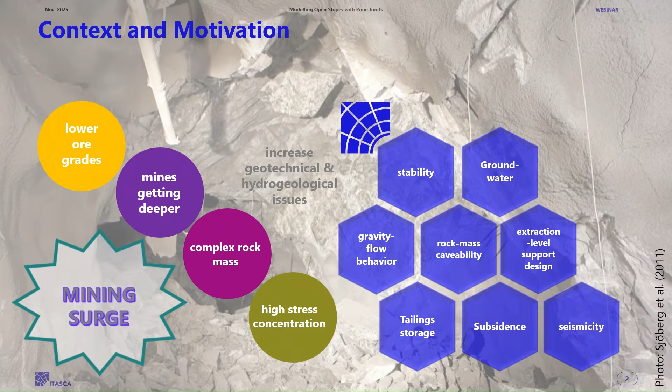If you are attending this webinar, it's likely you're into mining, as well as involved in analytical and numerical models. And we find this very exciting because mining is a field that's in high demand, especially now that we seem to be living the electrification boom. In very simple terms, as ore grades decline and mines become deeper, we increasingly face a more complex rock mass and high stress concentrations, which in turn lead to more difficult geotechnical and hydrogeological issues, such as seismicity, cavability, stability, or groundwater.

Important to keep in mind that every model is an attempt to represent reality. The model certainly contains simplification and assumptions given the heterogeneous nature of the rock and its surrounding. Still, these numerical models can be extremely complex. Depending on our area of interest, we may seek an understanding of rock breakage at the grain size as an assembly of minerals, or we might focus on large volumes as the rock mass.

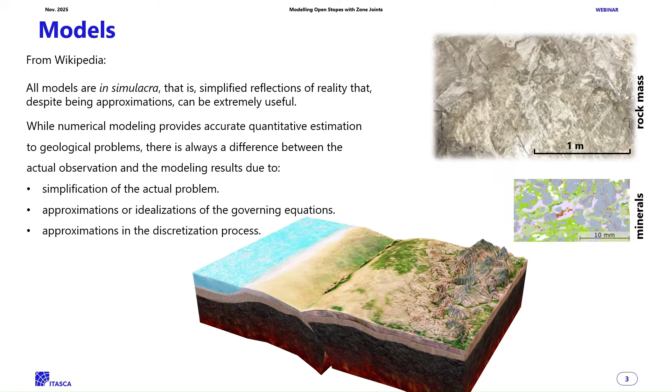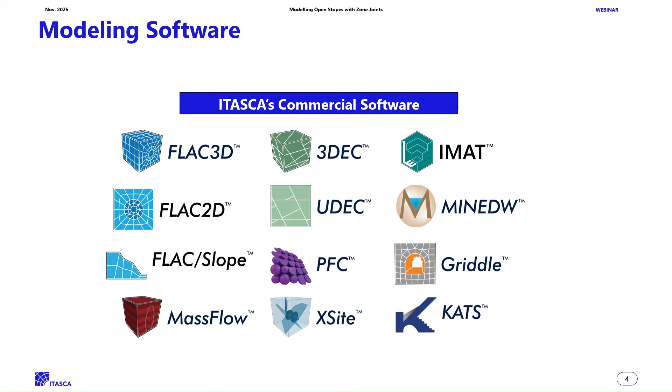The empirical analyses are often conducted in parallel with numerical modeling, using numerical inputs to broaden the scope of the assessment. While ITASCA has a range of robust and mature software, we continuously improve them to incorporate more data and information that comes with new technologies and advances in the mining sector, enabling them to run faster and produce reliable results.

IMAT automatically compiles FISH codes for the user. The IMAT allows tracking the mine sequence and provides a clear workflow to build, solve models, and analyze results. And IMAT also extends beyond a numerical modeling software, as it caters for multiple field data sources, including seismic data, block model borehole, and other monitoring data. The goal is to incorporate all of these data sources to improve our numerical models.

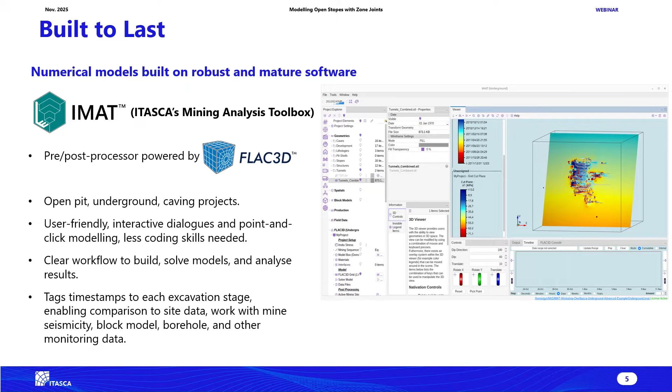Over the years, ITASCA's engineers and software developers have a proven track record of innovation working alongside our ITASCA consultants. We have developed new strategies, tools, and methodologies to better understand complex and very large models. While the computational limitations are less critical now than they were a few years ago, most of our models are still very computationally intensive.

Today, ITASCA can run large and complex models using MPI and cloud computing. And these large and complex models require the combined expertise and experience of our team to post-process and analyze the results. It is truly amazing how changes in hardware and software are evolving fast, and we can now look at the interaction of excavations taking into account the entire mining footprint.

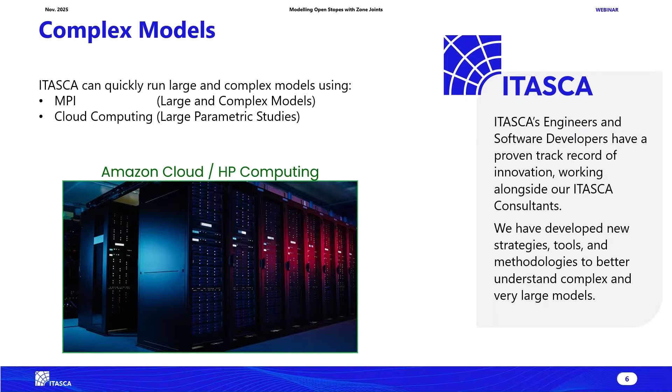So whether the challenge is an open pit or underground, whether it's a project or an ongoing operation, our ITASCA Consulting has a multidisciplinary team to provide practical field solutions to design issues and mitigate risks. In our work, we are specialized in the application of ITASCA's modeling tools to solve difficult or unusual problems across a wide range of mining methods and materials.

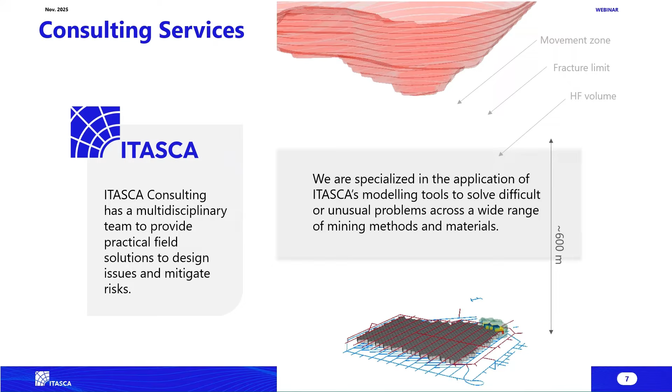The design of footprint is also changing, and we now have these extremely large layouts such as caves or super caves. So we see changes in design, equipment, and monitoring data, along with opportunity for real-time optimization. As we spoke about large and complex models, we want to share some insights from data collection. We want to highlight that ITASCA has in-house expertise to design field data collection campaigns, conduct the geotechnical characterization, compile and validate data.

It's also great when a mine site can collect a large amount of data, but it's also important to distinguish between different levels of confidence. We can work with the people on site, and this allows us to evaluate the quality of the collected data.

This helps us understand the variability and the level of confidence in the geological, geotechnical, and hydrogeological information input into the models.

Overall, we are seeing more projects being developed in varied and complex environments, often covering large footprints, and we know that these environments might be outside of our existing experience.

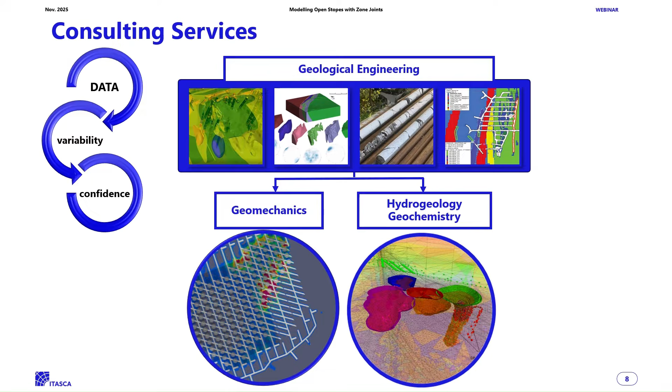We are here to offer our knowledge in data collection, processing, and running a variety of models and dealing with complex fields. We bring this up because the outcome of a model can change significantly depending on the input parameters.

For example, the structural geology, such as faults and joints, are equally important in determining the stability of an open pit and a stope located deep underground.

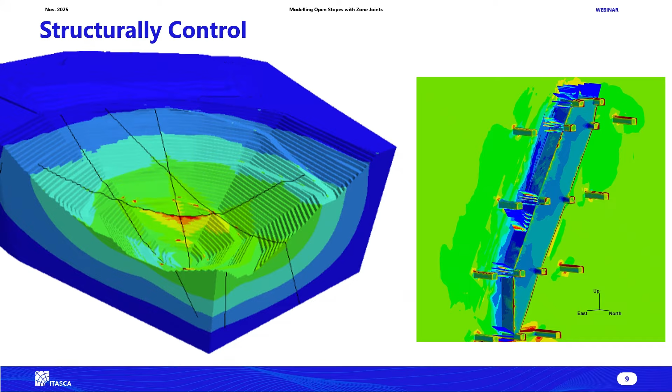In this webinar, we'll be talking about stability within the context of numerical modeling.

ITASCA's portfolio of completed models is extensive, and while we would love to showcase some of our large and complex models, confidentiality agreements restrict our ability to do so.

So today we will present some interesting examples of high-stress environments to demonstrate the rock mass responses when tunnels and stopes are excavated, as we are more likely to be working in deep or even ultra-deep mines.

We want to be able to more rigorously represent the ground conditions so we can capture high deformations.

Basically, we want to know if the excavations are stable, or if we are having squeezing or crushing, or what kind of support needs to be installed, as these are some of the important things impacting stability.

As illustrated in these pictures, we see that the size and the shape of the rock blocks formed around a tunnel and the failure process are conditional to structural geology, such as joints and faults, and the proximity and location of surrounding excavations.

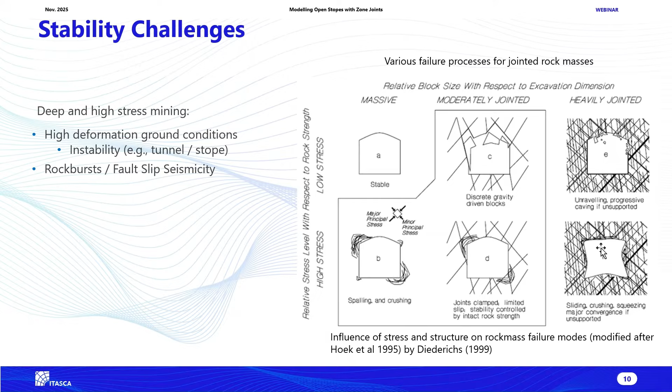They are also conditional to the local induced stress states.

When running three-dimensional numerical models, we first select the software. Here we will discuss two options, which are FLAC3D and 3DEC.

FLAC3D is an explicit finite difference software to model the behavior of materials that are subject to plastic yielding. It is a continuum-based code, but it can also incorporate structures into the model, either implicitly using the ubiquitous joints.

Or as discrete structures using interfaces or zone joints.

3DEC is a hybrid continuum discrete element software for modeling block or highly jointed systems. Materials are represented by a network of continuous blocks with surface conditions, and these blocks may rotate or slide along joints.

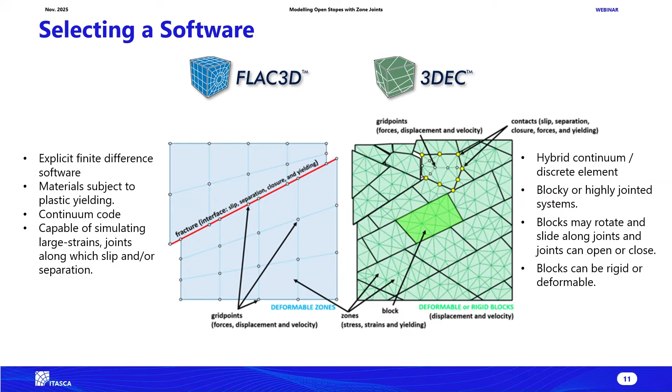FLAC3D is best suited for modeling rock masses that behave predominantly as continuous media with limited jointing, while 3DEC is more appropriate when the mechanical behavior is strongly influenced by joints, faults, or structural discontinuities.

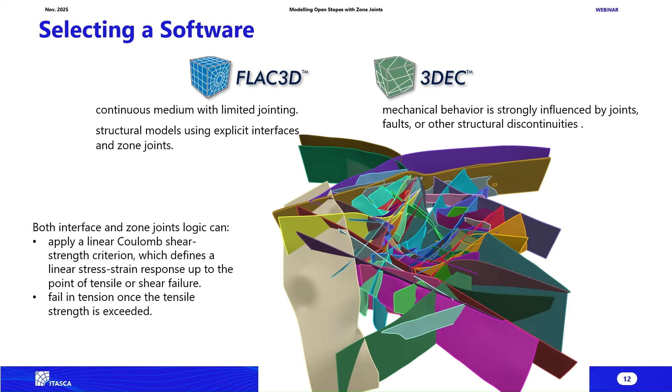For the constitutive models, both FLAC3D and 3DEC have the option to use IMASS as a built-in constitutive model. IMASS stands for ITASCA Model for Advanced Strain Softening.

One of the key aspects of IMASS is the ability to capture the post-peak behavior of a rock mass, in particular the progressive failure and disintegration of the rock in the post-peak, as we see in this schematic illustration.

The graphic shows a bilinear envelope in the post-peak, from point A to B and point B to C, which captures the two-stage softening behavior of a rock mass being excavated or undergoing caving.

This includes the bulking in the material and the change in the modulus of the material. IMASS is based on empirical relationships and uses strain and zone size dependent properties.

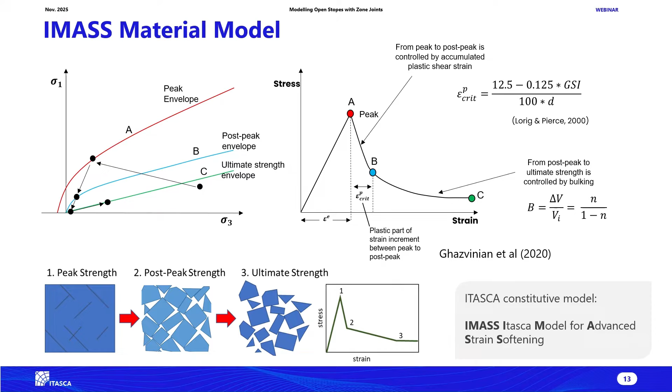This constitutive model is used across several projects at ITASCA, and it has been used in the examples that we will show here.

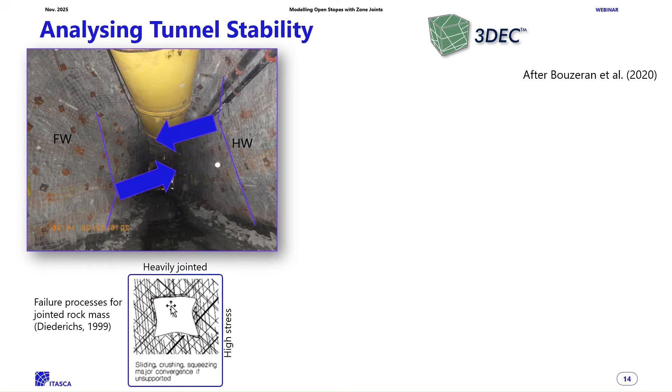This is an example of a back analysis for the drifts at Westwood Mine. We can see the similarity between the photo and the schematic illustration below. We have a very anisotropic rock mass in high stress concentration, which has been deformed quite a lot. On the right-hand side, we have a model built in 3DEC by ITASCA, so please feel free to check out the publication for more details.

The objectives of the back analysis were to better understand the mechanisms controlling rock mass performance and to obtain a calibrated model for predictive stoping simulations.

The calibration uses properties derived from field and laboratory, and we have illustrated the boundaries of the initial excavation here, plotting the amount of horizontal displacement recorded in the model. One of the benefits of this model is to have a more accurate representation of the depth of damage and the mechanism that arise near the drift.

As mentioned, 3DEC is really good at modeling block and highly jointed systems, so we can capture these large displacements in the drift. We see the anisotropic rock mass, the breakage of blocks, and the hinge lines formed, as well as the deconfinement that occurs when buckling around the excavation.

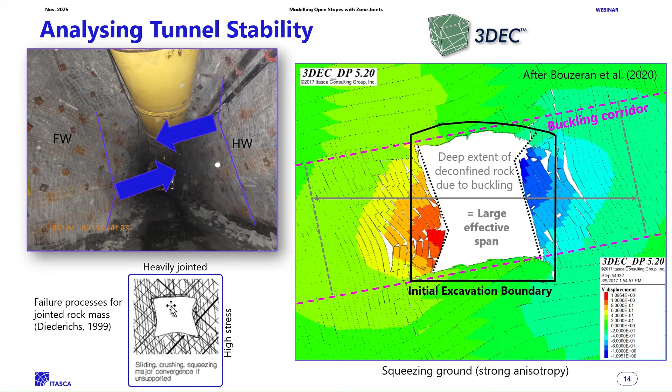Now we have 3DEC models with ground support. These examples illustrate the bonded block model, BBM approach, which can be used to simulate the rock mass as bonded polyhedral elements. So these blocks can break along the subcontacts or bonds due to stress concentration. And we have a hybrid bolt model to represent the ground support.

The example on the left-hand side can be found on our website, and it shows the emergent fragmentation around a mine drift that occurred as a result of a stope excavated nearby. The model mimics the initiation of crack, coalescence, and propagation, which fractured the rock mass. And in this model, the minimum principal stress reaches up to 90 MPa.

On the right-hand side, there is a numerical model to study the performance of tunneling at depth under a cave-induced stress path. This is also a publication from ITASCA. Essentially, the movie shows the transient loading on the ground support installed in highly stressed fractured rock. In this case, we can observe how the effect of debonding cables and bolt installation timing influences the bulking evolution around the excavation. The effect of the damage to the cables themselves is also investigated.

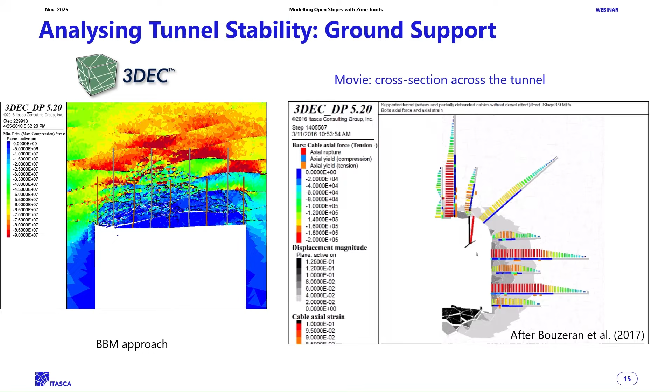The hybrid bolt model in 3DEC allows for visualization of the damage developed around the tunnel and the breakage of some of the support elements. The outcome is that intense axial straining can be mitigated through debonding, and intense shearing can be reduced through the use of bolts with higher shear resistance, such as rebars.

Moving on to FLAC3D, we have two examples of tunnel stability where ubiquitous joints are used to represent the foliation in these models. The orientation of the pre-mining in-situ stress relative to foliation, the abutment, and the alignment of pillars significantly influence the damage of these excavations, and this has been simulated in some of our large parametric studies.

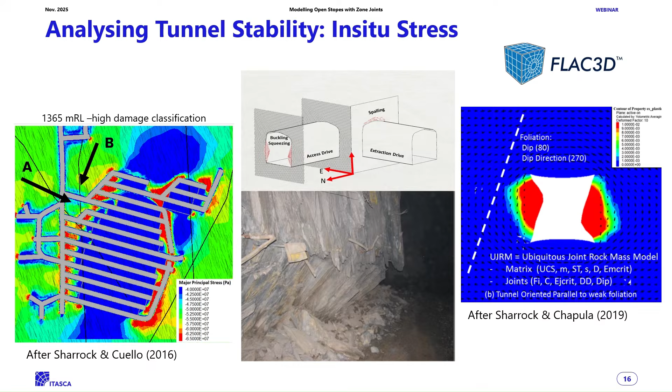So we observe this issue regarding the orientation of the tunnels, whether the footprint should be oriented relative to these structures to promote caveability and also to ensure stability of the excavations. Additionally, it's equally important to understand the in-situ stress, which we define as the trend of the major principal stress, the dip, and the gradient, and how these factors affect stability.

Without further ado, we will show our example of stope stability in detail. We picked a relatively simple model of a high-grade copper ore located deep underground. The stope geometry is from a real case operation where the mining method is sublevel long hole open stoping with cemented backfill.

The goal is to run a stability analysis for the extraction of these large open stopes in a complex geological environment. Following up on the previous slides, we have used the IMASS for the constitutive model of the rock, zone joints for the structures, and ground support with cable bolts as we simulate stability in FLAC3D version 9.5.

The figure on the right-hand side illustrates our stope excavated about 1,500 meters below the surface. In this scenario, the stope is situated within a blocky rock mass intersected by dense structural features, particularly in the hanging wall, which pose significant challenge to ground support performance.

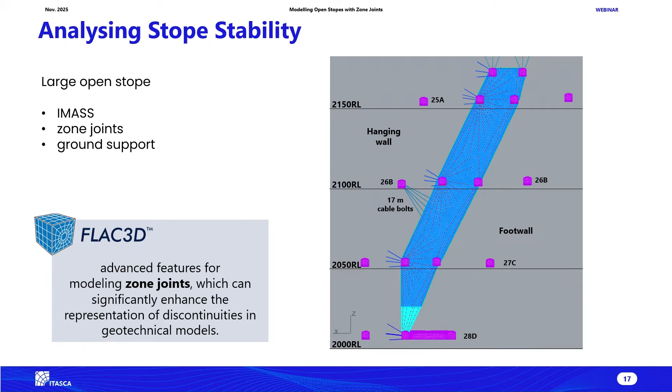We will show how we can capture both structural and stress overbreak, as well as the impact of ground support controlling overbreak. So let's start. First, we need to create a deformable zone model in FLAC3D.

For that, we started by preparing our model geometry, which can be created or imported into a CAD software. We need to represent the tunnels, our large stope, the ground support, the geotechnical domains, and the joints.

In our work, we used Rhinoceros 3D, which allows us to plug in our Griddle. Griddle is a fully interactive and general-purpose mesh generation tool developed by ITASCA. Since we are building a fully conforming mesh for this model, the commands intersect, remesh surface, and volume mesh in Griddle were extremely useful for creating this geometry.

The figure on the left-hand side shows the mesh and the sequence for the model created with Griddle and imported into FLAC3D. These are the dimensions of our stope. The height is about 170 meters. The stope is 27 meters wide and 40 meters in length along the strike.

The extraction sequence has 5 stages, which started with tunneling and installation of ground support using cable bolts. Next, we extracted the trough undercut, then created a 5-meter slot, followed by a 10 meters ring firing 1 and a 15 meters ring firing 2, as illustrated here.

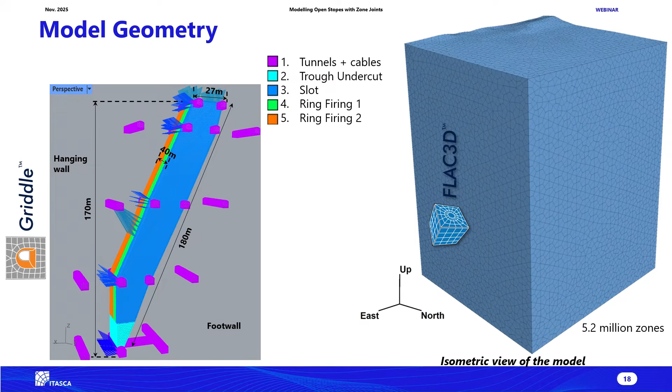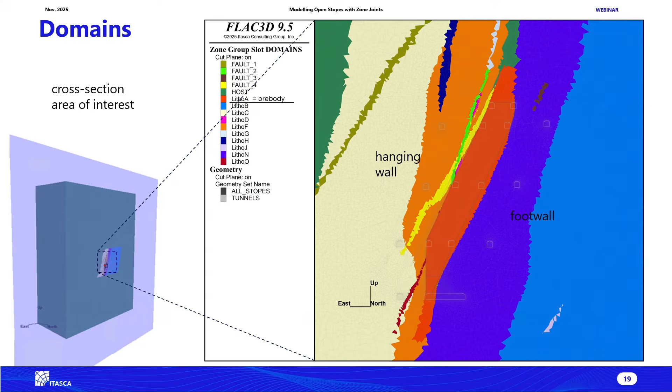The model has different geotechnical domains represented as a series of DXF wireframes, which are also imported into FLAC3D. This cross-section shows the area of interest, with our stope located about 1,500 meters below the surface. Overall, the rock is quite competent, but we also have some thin domains that we refer to as faults in this example, and some of them can gradually reduce the rock strength.

For this model, zone joints are used as an alternative to interfaces. The zone joints can be used to better represent multiple intersecting joints, faults, or discontinuities in small strain FLAC3D models. And the Mohr-Coulomb model is the default joint behavior.

We have simulated two models, which we named Model A and Model B. We have an identical geometry for the stope, the domains, and the in-situ stress. The only difference between the two models is the number of zone joints located parallel to the hanging wall.

Model A includes 147 zone joints in total. The structures parallel to the hanging wall have slightly lower strength parameters compared to those perpendicular to the hanging wall, as well as those randomly located around the stope.

Model B includes 90 zone joints. Essentially, we have reduced the number of structures parallel to the hanging wall, and all structures have the same strength properties as those perpendicular to the hanging wall in Model A.

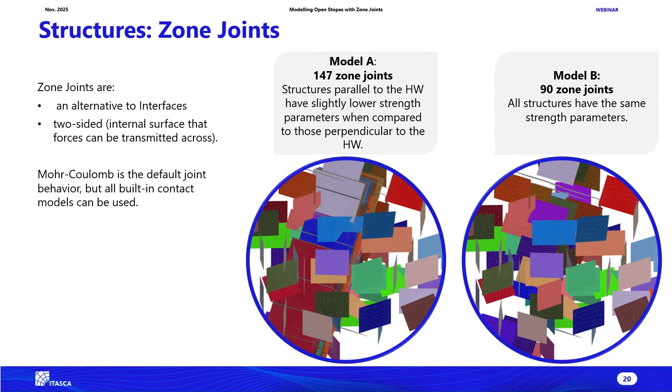The zone joints for Model A and Model B are illustrated here, and our goal is to capture the influence of these structures parallel to the hanging wall. In the following slides, we will present the results for Model A and Model B side by side for comparison.

Since Model A has a number of zone joints parallel to the hanging wall, they may continue to fail until competent rock is reached.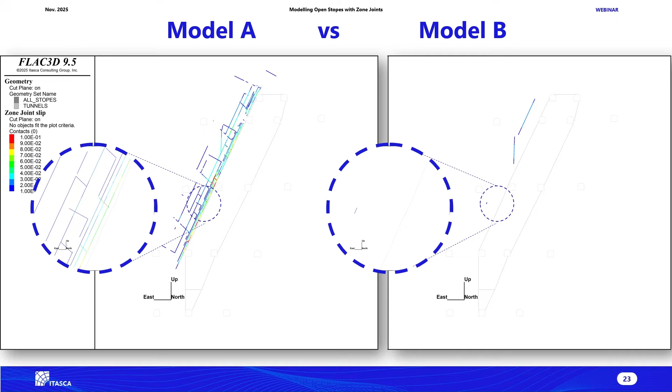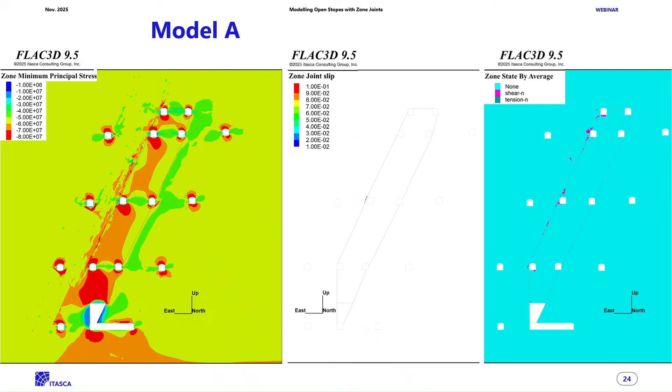Here are videos of major principal stress, state by average, and joint slip for Model A, played together to illustrate the model's progression through the excavation stages. We use these videos with our consultants to provide a clear visualization of the model's behavior, and it would be good to include other cross-sections as well.

Now we plot the results of the velocity magnitude in the stope wall rather than a cross-section. The velocity magnitude is a metric we use in our projects, and it provides a very good indication of areas of the model that are actively failing.

For the FLAC3D analysis reported here, the stope is considered to be in a state of failure when the numerical velocities exceed 1e-5 meter per model step. This plot shows that overbreak and instability occur in the hang wall of Model A, but not Model B.

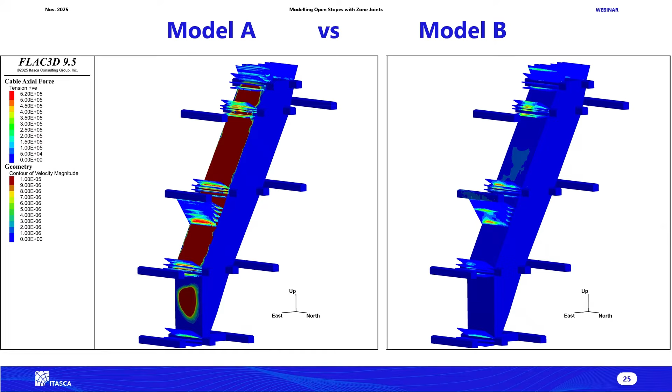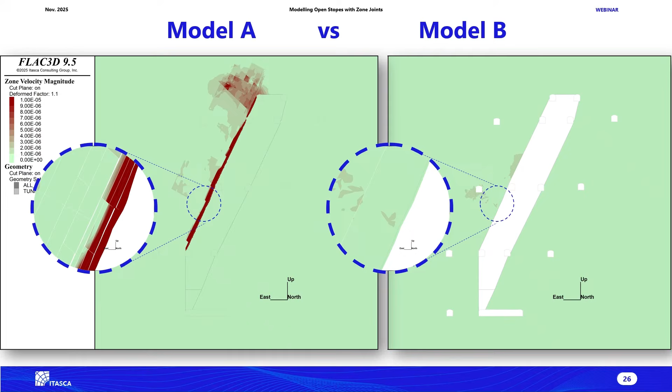Also, the axial forces in the cable bolts are represented here. The red pattern indicates the locations where the axial capacity of the cables has been exceeded. And if you look at the velocity magnitude plot in the cross section, it can give us an estimation of the depth of breakage, which is also consistent with our previous plots.

And here we have put all these plots together so we can compare Model A and Model B. In the next slide, we will take a close look at the hang wall.

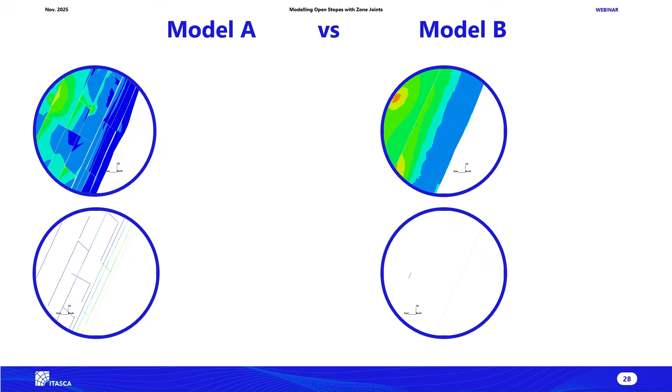We have already presented these plots, but we want to emphasize the influence of the zone joints, because the zone joints are a critical component for these models. We can see that overbreak and instability of the hang wall are structurally controlled.

By simply decreasing the number of structures in the hang wall, we shifted from unstable to stable stope. From experience, we see some movement along the joints or none, also failure of the rock mass or not, as well as cables failing or not.

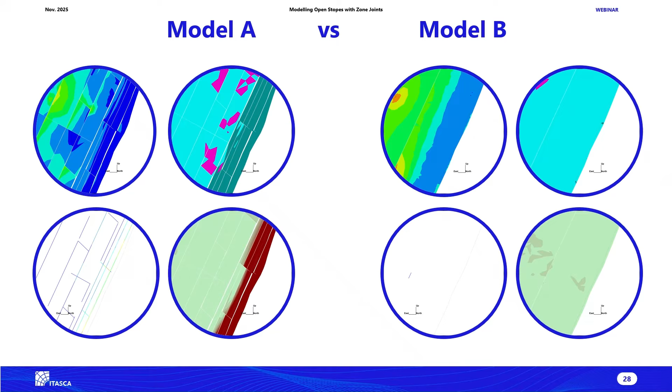In this webinar, we discussed that by definition, every model is an attempt to represent reality. Numerical models will include simplifications and assumptions, but they can help us understand complex geotechnical behavior.

ITASCA has different software that allow us to address specific challenges. Through continuous advances in software, data integration, and computational power, we can achieve more realistic and predictive behavior.

We can run and analyze large and complex models, and while quality data and local understanding of rock behavior are critical for the model's outcome, it's also important to update the models.

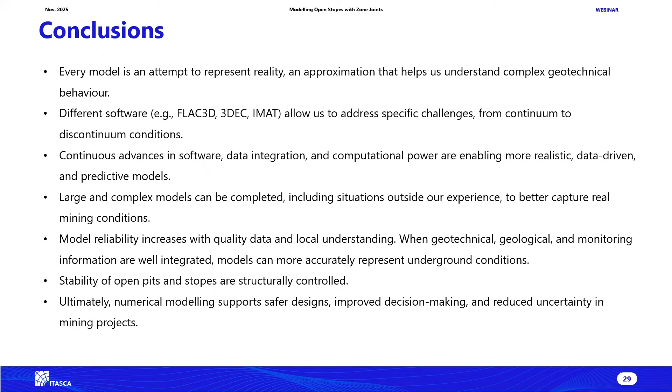We saw some examples of models, including the zone joint in FLAC3D, and similar to open pit, the stability of stopes is structurally controlled. So numerical modeling can be used to select a safer design, improve decision making, and reduce uncertainty in mining projects.

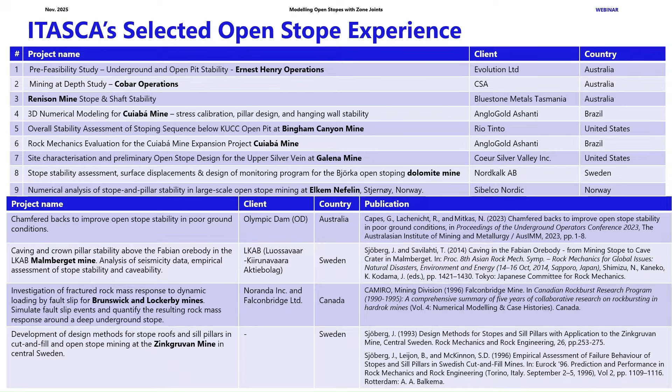Since we are providing an example of an open stope, we compiled a list of projects and research conducted on this topic across ITASCA to demonstrate our capability.

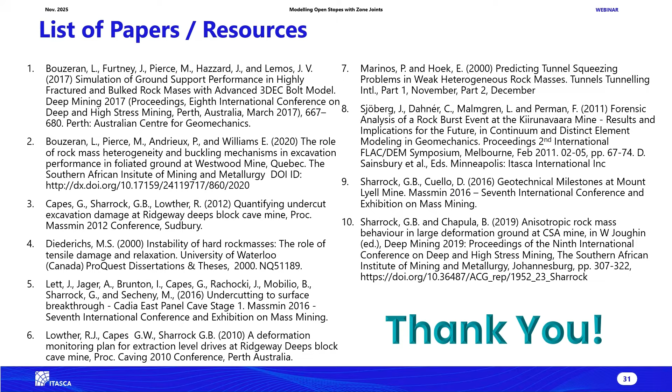This is Jim Hazzard. I will now dig into the details of how to model faults and discontinuities in FLAC3D and IMAT.

It is certainly possible to model discontinuities in FLAC3D, even though you may think of FLAC3D as a continuum modeling program. There are different ways that we do that. There are really two main ways of doing this. Number one is using the ubiquitous joint constitutive model.

You can see here on the left a conceptual picture of what that might look like. Imagine you have a set of parallel, closely spaced joints. You don't necessarily want to put all of those joints in your model as actual discontinuities. You can assign the ubiquitous joint constitutive model, and the continuum will then behave as if there were a set of parallel joints in there. You specify an orientation and a strength for those joints, and again, the continuum will behave as if the joints were there, but we're not actually putting discontinuities in there.

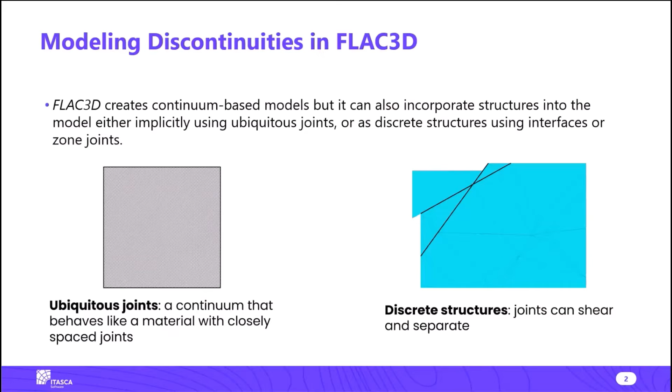If the movement, for example separation and shearing on actual discontinuities, is important, then you probably want to explicitly put specific discontinuities in the model, especially if you have major faults or other things that have been mapped and the behavior of those things is important. Then it is possible and advisable to put them in as discrete structures within the model.

Now, interfaces and zone joints. These are two very similar things, but there are some subtle differences here. Before FLAC3D version 9, we only had the ability to put in what we call interfaces. These are true discontinuities. You identify the faces where you want to have a fault or a joint, and you do a separation - you're duplicating the grid points. This allows there to be movement between the two sides, opening and potentially shearing.

But the way interfaces work is that they're really one-sided. So imagine you're painting this discontinuity onto one side of the split - shown in purple here - and on the other side, it doesn't consider itself part of the discontinuity. All the calculations, the forces and displacements, are calculated on the purple side, and the gray side is just reacting. This is fine, it works okay, we've done it for years. It just gets a little weird when you start considering complicated intersections, because these are one-sided - what is actually happening at these intersections, and which side is dominant and which side is not.

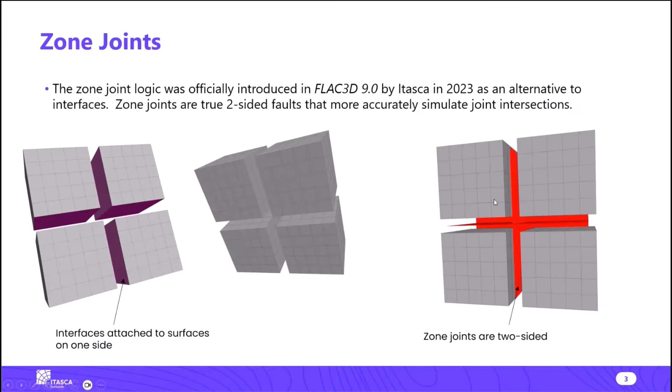Post version 9, we have a new technology which we call zone joints, and this is a true two-sided discontinuity. Again, you identify the faces where you want slip to occur or separation, and you do a separation, duplicating the grid points, same as before. But now we have a two-sided joint, so we don't have to identify which side the interface is on. Both sides will interact with each other when they come into contact, and you get slightly more realistic behavior. It also makes the joint intersection behaviors and calculations much more accurate. So post version 9, I'd say more people are using this zone joint technology and moving away from the older interface technology.

Either way, whether you're using zone joints, interfaces, or ubiquitous joints, we assume a Coulomb shear strength criterion - probably familiar to you. The shear strength is dictated by a user-specified cohesion, a user-specified friction angle, and then the normal stress and potentially water pressure.

If you plot shear stress versus shear displacement, you'll see linear behavior as the shear stress increases according to some user-defined stiffness. Then you reach the shear strength, which is the cohesion plus the normal stress times the tangent of the friction angle, and then this thing will start to slide. It's possible to specify a residual cohesion and a residual friction angle different from the peak. That means once sliding starts, the joint actually weakens - the strength decreases instantaneously, you'll see a new strength, and it will continue to displace in shear at a constant shear stress, happily sliding along there.

If I plot instead shear strength versus normal stress, you can see the typical Coulomb curve you're all used to seeing, where at zero normal stress you have a strength determined by the cohesion, and then strength increases according to the friction angle. Again, if this strength is exceeded and it starts to slide, you can drop down to a residual strength. Often people set the residual cohesion to be 0, which makes intuitive sense, and often set the residual friction angle to be the same as the peak friction angle. So the residual strength curve might look like this.

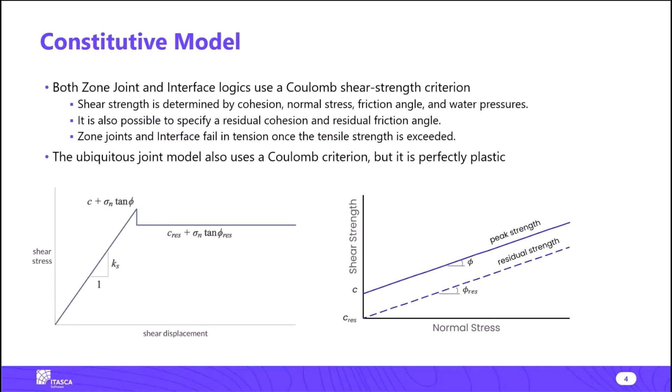So how do you put discontinuities into FLAC3D? For ubiquitous joints, it's easy. You just specify an orientation and a strength, a cohesion and a friction, and assign that to zones. You don't need to worry about changing the geometries around. You just identify a region full of ubiquitous joints and assign the necessary properties, and it will behave as if there were a parallel joint set there.

For zone joints or interfaces, it's a little more complicated because you need to identify where these discrete features actually are. The way it works is you identify a set of zone faces, and then do a separation operation where the faces are separated and the grid points are duplicated. This allows relative movement between the two sides.

For complicated geometries, if you have a bunch of intersecting faults, maybe like in this example, you will almost certainly need to use Griddle or some other similar software to generate the geometries such that the faces line up with the actual mapped discontinuities.

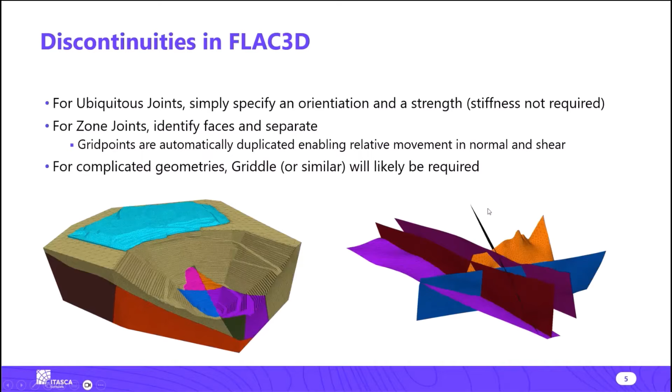It is also possible to simulate discontinuities in IMAT. Again, you could use the ubiquitous joint model. There's no built-in way to actually create true interfaces. You could potentially use Griddle, and I'll show that on the next slide. But one thing you can do within IMAT without leaving the program is create these weak zones.

As you may know, IMAT builds models using an octree system. This means the whole model is composed of little cubes, small cubes in the region of interest, and bigger cubes away from the region of interest. Here, for example, we have an open pit. It does a pretty good job of matching the geometry of this open pit, but it's not perfect, not an exact match.

For modeling a discontinuity or a fault, it's not that easy to get an exact match to the surface of this fault. So instead we can find all of the zones that are touching this fault or within some distance of it and give them a set of weak properties. So instead of modeling a true discontinuity, we're modeling a weak zone. In some cases that's great, in some cases maybe not.

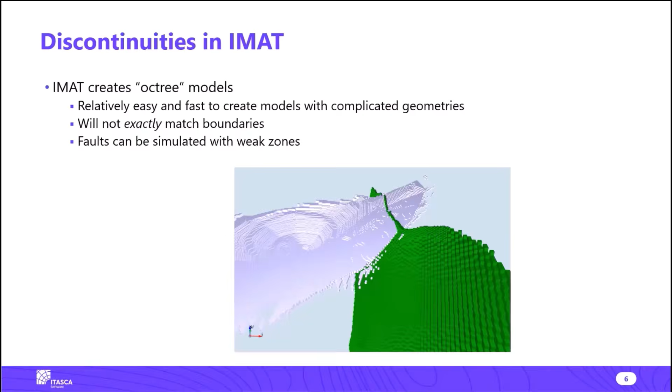If modeling the actual discontinuity itself is important, it's still possible within IMAT, but you need to generate the geometry first with Griddle. If you generate the geometry and have identified faces that line up with certain faults or joints, you can import that into IMAT, and everything becomes relatively easy. You can choose the faults and assign properties using the IMAT interface.

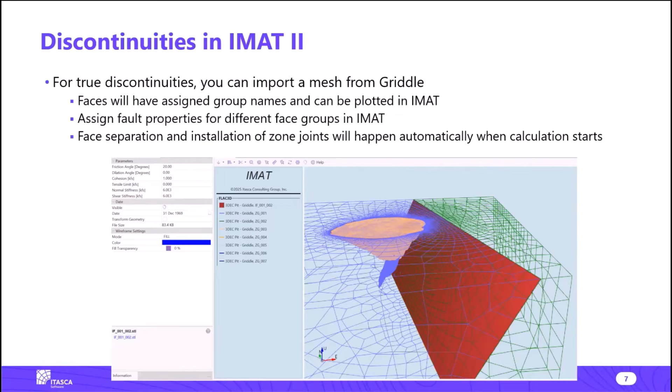Here I've got a model with just one fault in it, and I can specify friction angle, cohesion, tension limit and so on. Once I've set up my model and properties, I hit run, and the operation of separating and duplicating grid points and assigning properties all happens automatically. Then when it's done calculating, I'm back in IMAT and can look at the results.

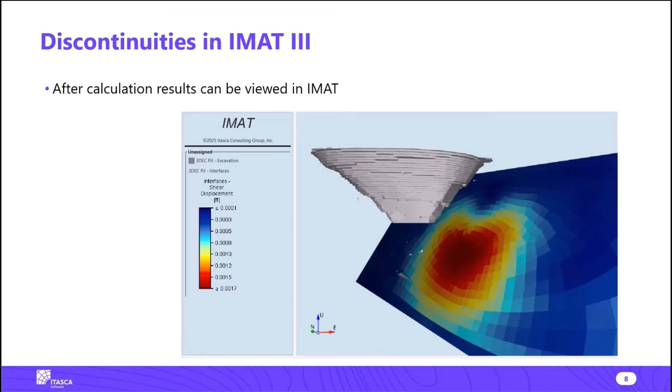Here's the same example. Now I'm just looking at the shear displacement on the fault. Of course there are other things I can do, cut planes and isosurfaces and so on. This is just showing you how it's possible to look at results on these discontinuities within IMAT.

So to summarize, if you want to model discontinuities in FLAC3D or IMAT, you can use the ubiquitous joint model, you can use interfaces or zone joints - these are very similar - or you could make a band of weak zones, which is relatively easy as well. Whichever method you use, we assume a Coulomb shear strength criterion where you specify a cohesion and a friction, and possibly a tension strength.

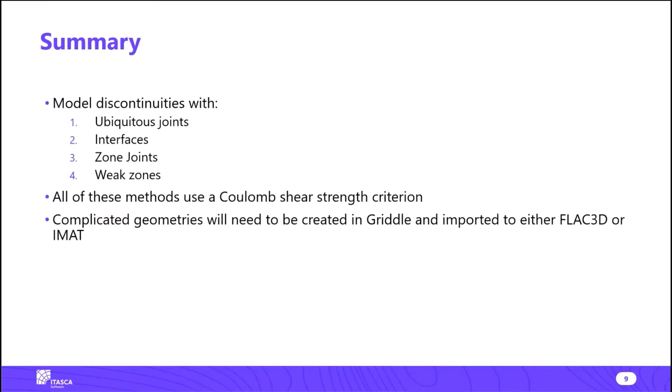If you have relatively simple geometry, like something bedded, maybe a coal mine, it would be possible to build this in FLAC3D and identify the faces that form the beds and do the separation. If you have more complicated geometries with intersecting faults, most hard rock mines, you would need to create the geometry in Griddle or similar, and then import that into FLAC3D or IMAT. And that's all I have, thank you for your time.